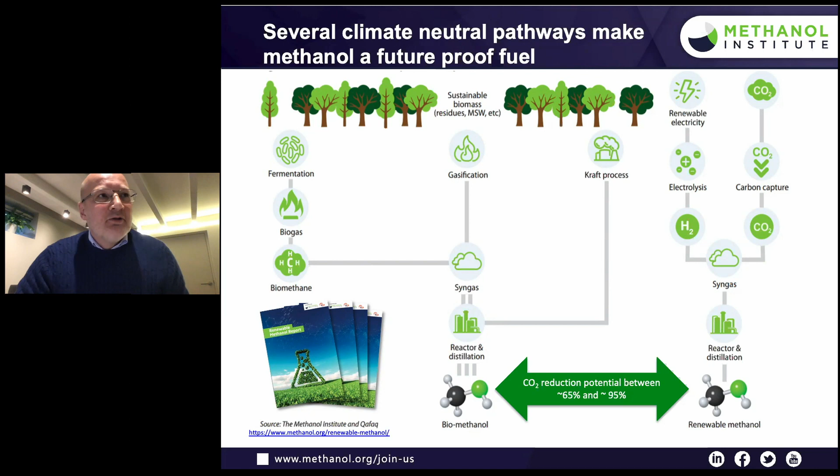And in the previous presentation, there was a question around efficiency as well. I would recommend to download a recent paper from Frontier Economics in Germany that looked into this question around efficiency, not just the efficiency of the engine, but also the efficiency of the production processes. And basically, it raises the question whether, from a sustainability perspective, energy becomes the most important topic when you take into consideration that the availability of renewable energy doesn't have to be the restricting factor.

In principle, when we're dealing with depletable fossil resources, energy efficiency is very important. But when we know that we can generate as much renewable power as we need, then efficiency in the decision criteria becomes less of an important factor. It becomes much more of a determining factor for the economics, the cost of a process. So if you have a less efficient process, obviously the finished product is more expensive.

But the key thing here is, why do we produce renewable methanol, biomethanol? It helps reduce the carbon footprint of different applications, especially different types of energy applications. And when we look around the world at how methanol is being used as a fuel, it's interesting to see that it's not only limited to one part of the world. We have often spoken about the use of methanol as a fuel in China. Probably everybody knows about the use of M15 fuels in gasoline vehicles.

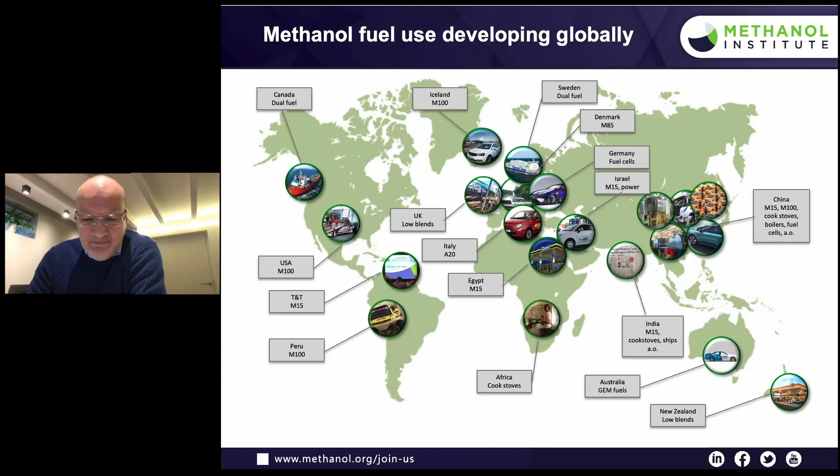But actually, there's a lot of different applications in Asia, in Europe, but also in the Middle East, in Australia, in South America, and also North America and Canada. And that ranges from cars to ships to cook stoves to electricity generation. But rather than taking you through all these different examples around the world, as a marketeer, obviously, I've tried to segment this a little bit more into specific areas.

And broadly, you can distinguish 4 segments for the use of methanol as an energy carrier. It's either as a fuel for road transportation, as a clean fuel in shipping, a fuel for heating, or a fuel for power generation. And those 4 categories are the basis for my next couple of slides. Starting off with road transportation.

And as Martin explained in his presentation, methanol being a high octane fuel, typically our industry looks at methanol as a gasoline component or a gasoline displacement. So many of the examples that we see around the world focus on the use of methanol as a low blend component in gasoline fuels, something which is being done amongst others in New Zealand and the UK. But we're seeing a growing interest in mid-level blending as well.

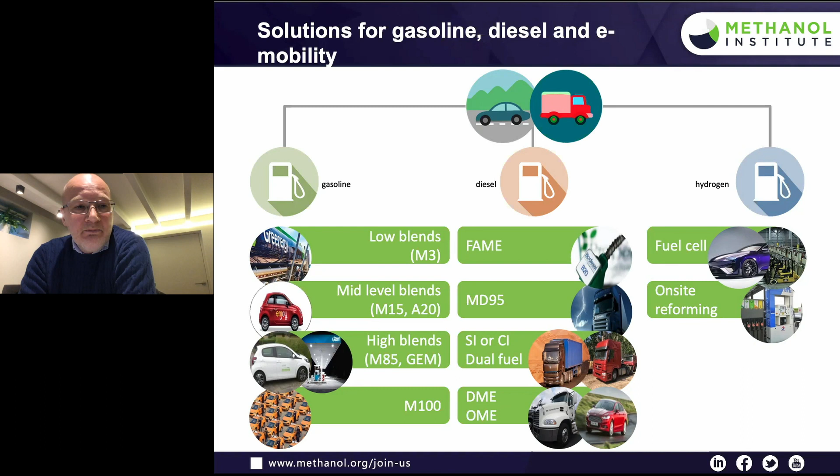The M15 example in China, where demand for methanol reaches close to 5 million metric tons per annum already as a fuel component. But closer to home here in Europe, we have developments around the use of A20 blends, which is 5% ethanol and 15% methanol. One of the companies leading this work is Eni in Italy, together with Fiat Chrysler. And one of the reasons they're doing this is because they can demonstrate that they can reduce the CO2 tailpipe emissions of existing road-going vehicles without any modifications.

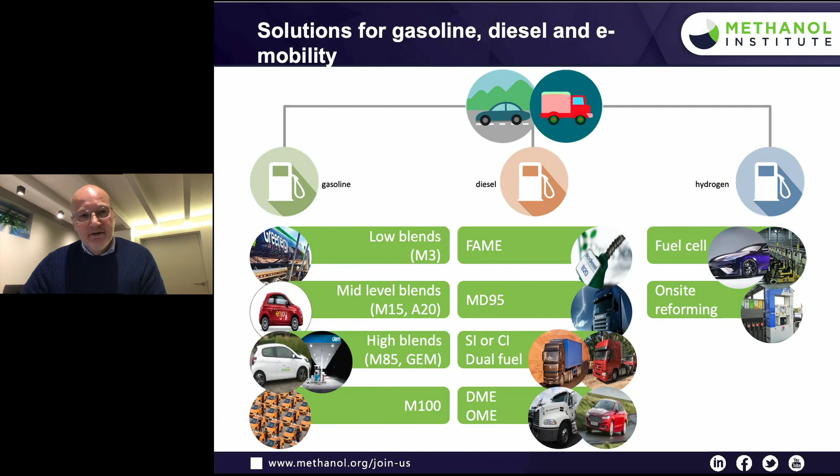But if you look into what can be done in terms of even higher shares of methanol, there's an interesting project in Denmark right now that is looking to demonstrate the conversion of locally produced biomethane into biomethanol to run M85 vehicles. In Australia, Coogee has done a lot of work around gasoline ethanol methanol blending in flex fuel vehicles. So typically cars that were designed to run on E85 that can also run on blends of ethanol, methanol and gasoline.

And then going all the way to 100% methanol in China, there are now over 20,000 certified taxis that run on neat methanol, and that number is increasing by the year. And one of the reasons why this is increasing is because it is not only contributing to lower emissions in the cities, but it is also an attractive economic solution for the taxi drivers.

Then again, methanol is also being used for diesel applications, obviously as a feedstock to produce biodiesel. Martin spoke about the example of MD95, but we're also seeing developments around converting diesel engines to run in spark ignition mode, in similar fashion as we know for some of the LNG trucks that exist in Europe. But there are developments around the use of methanol in compression ignition engines as well, using diesel as a pilot fuel for trucks. And something that, especially in Sweden, is still being looked at as well is the use of DME as a diesel substitution.

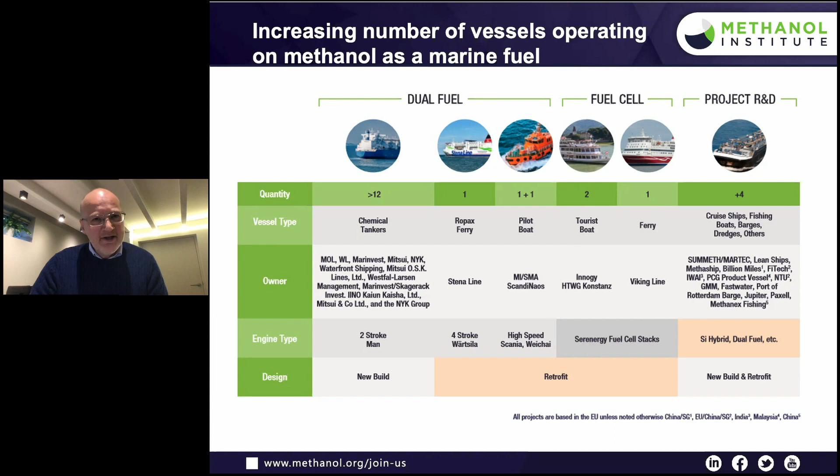But it's not just in transportation. It's also to produce electricity, either through fuel cells for remote areas, for example for mobile telephones, or gensets. We have an interesting project here in the west of Europe where we're looking at shore power through gensets using methanol as a clean fuel to provide electricity to ships. In Israel, there are turbines running on methanol that previously ran on diesel, but when they ran on diesel, the local emissions were so high that they were only allowed to run a minimum amount of hours, whereas now with methanol, these turbines can run non-stop.

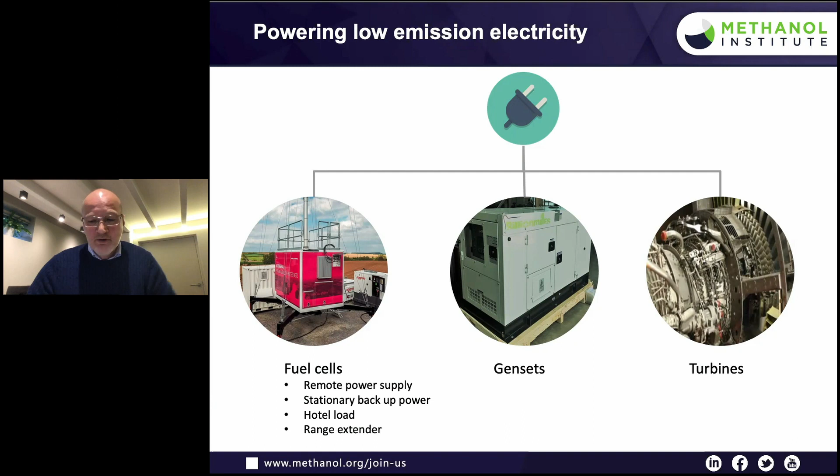And then a very important development is the use of methanol as a displacement for solid fuels in industrial boilers, for example in China. There are now over 1,000 units running on methanol. Today, the demand is approximately 2 million metric tons, but it is expected that demand will increase to at least 5 million metric tons. Then there's the use of methanol as a fuel in ceramic and glass kilns. And the interesting thing there is that the flue gas is actually cleaner than it was with coal, so the quality of the product improves.

China smokes, I think, 1 in 3 cigarettes that is being smoked is smoked in China. So tobacco drying is a very important industry in China. They are increasingly using methanol as a fuel as well. And then cook stoves. Obviously, if you use methanol as a fuel for cook stoves rather than coal or wood, your local air quality improves a lot as well.

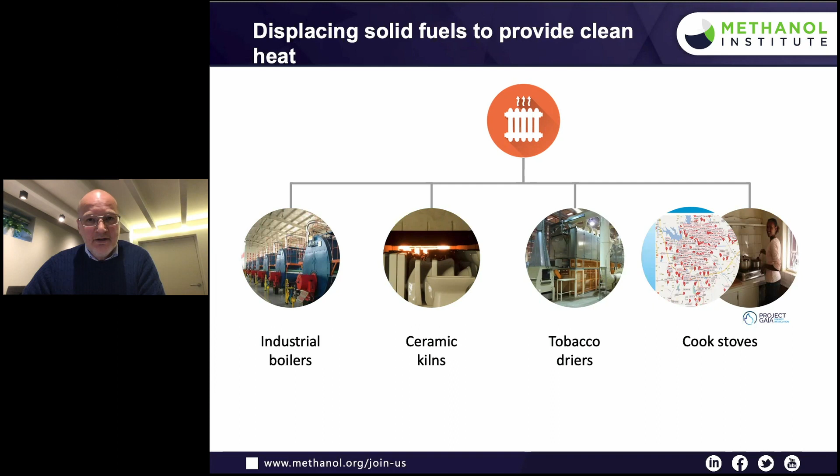Simple example, in the city of Hefei in China, a city with over 8 million inhabitants, there are over 2,000 medium-sized, large-scale restaurants, and 1,200 of them use methanol cook stoves. And interestingly enough, the supply of the methanol is managed through the Internet of Things. So methanol is certainly much more used as an energy carrier than just in road or marine fuels. It's gaining traction in a lot of different areas.

And the main driver for this is, to a large extent, also driven by legislation. On the one hand, it's driven by the need for renewable energy. It's driven by the need for solutions to store increasing supply of renewable electricity. But obviously, there are big benefits for not only carbon emissions, but also for local air quality. And for many developing nations, it's also an interesting way to become less dependent on energy import and to develop their local energy supply.

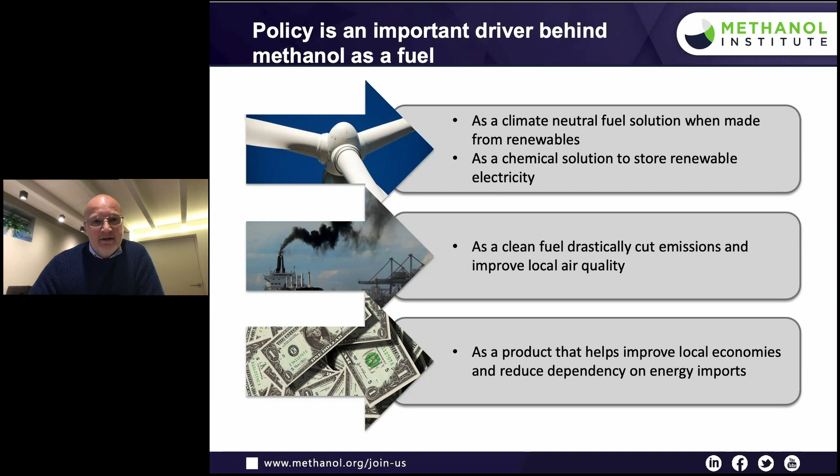So to summarize, yes, methanol demand as an energy carrier to a large extent is driven by legislation, but the use of methanol and their derivatives provide a tremendous amount of benefits, especially when it's made from sustainable renewable feedstocks. And as I hope I've demonstrated to you very briefly, it can be used in many ways as an energy carrier for road transportation, for the maritime sector, as well as for generation of power and heat.

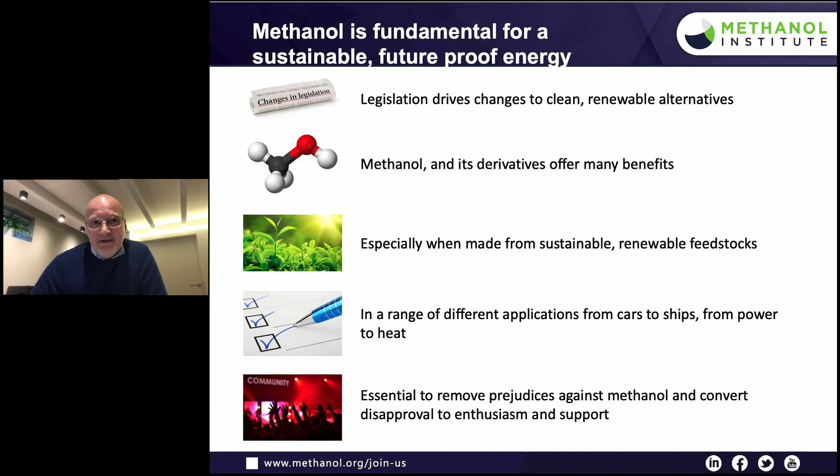But in order for methanol to continue to grow, I would encourage everybody to take the words from today's conference and spread the word as well, because we see still a lot of prejudice around methanol, and not all of that is necessarily fact or science driven. There's a lot of things still circulating around methanol which are not factual, and a lot of the benefits are simply not being seen. So I thank Sebastian and Martin for all the work they're doing to spread the word, and let's continue to support the work that they're doing in this area.